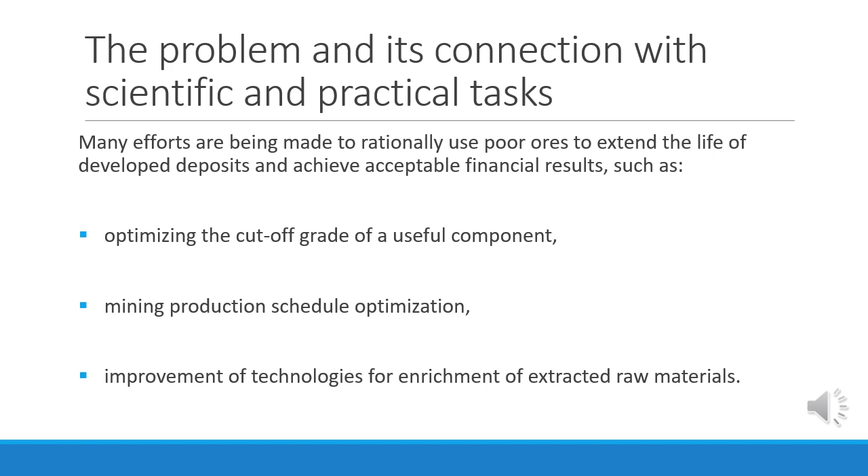The key task of information support for the effective control of ore grinding classification processes is the operational measurement of its granulometric composition and determination of the degree of grinding required depending on the physical, mechanical, and chemical mineralogical properties of the enriched raw material.

A promising direction in the development of methods to solve this problem is using non-contact and non-destructive testing tools based on ultrasonic, magnetometric, and nuclear physical measurements.

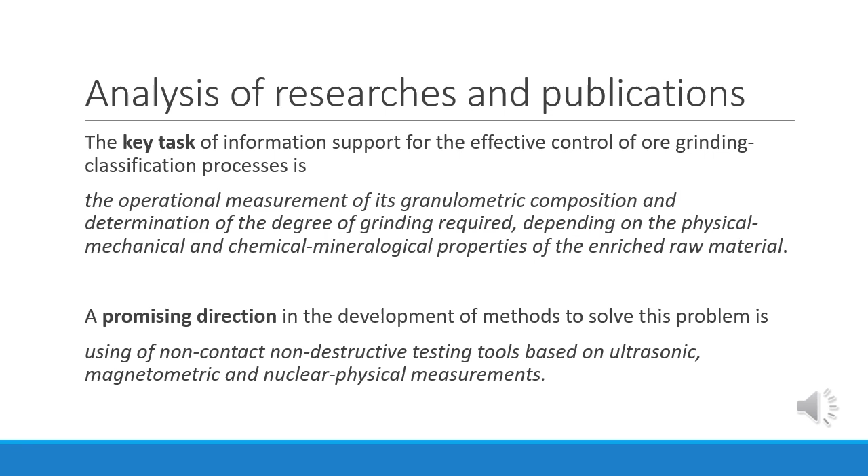There are different mineralogical varieties of ore that enter the beneficiation process. These varieties differ in several characteristics of inclusion of a useful component, fineness of inclusion, which requires various degrees of grinding for its complete disclosure.

As a marker of the changed qualitative composition of the crushed ore, it is proposed to use the density of particles of the solid phase of the pulp in the process of its deposition directly in the technological units of concentration plants. This parameter is determined based on the result of measuring the attenuation of bulk ultrasonic waves and Lamb waves propagating in the iron ore pulp and metal plate that is in contact with it, as well as the level of the pulp in the process tank in which it's located.

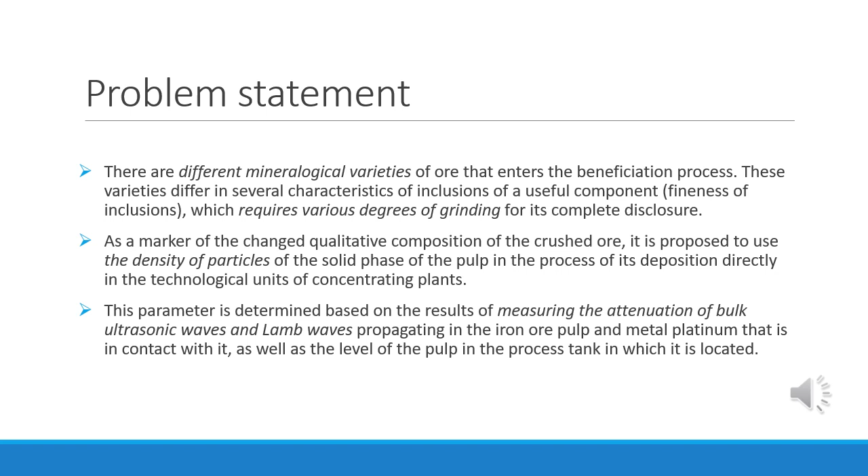On the figure, a typical technological scheme of the process of grinding ore during its enrichment is shown, which is widely used in processing plants. Initial ore and water are supplied to the mill, which operates in a closed cycle with hydrocyclones. Their flow is monitored by the sensors and controlled by a closed local automatic control system based on proportional integral derivative controllers, PID controllers.

The ore crushed in the mill is pumped through the mill discharge sump to the cyclone clusters. Hydrocyclone sands are returned to the mill and the overflow through the rougher feed tank is fed further to flotation or magnetic separation technological processes.

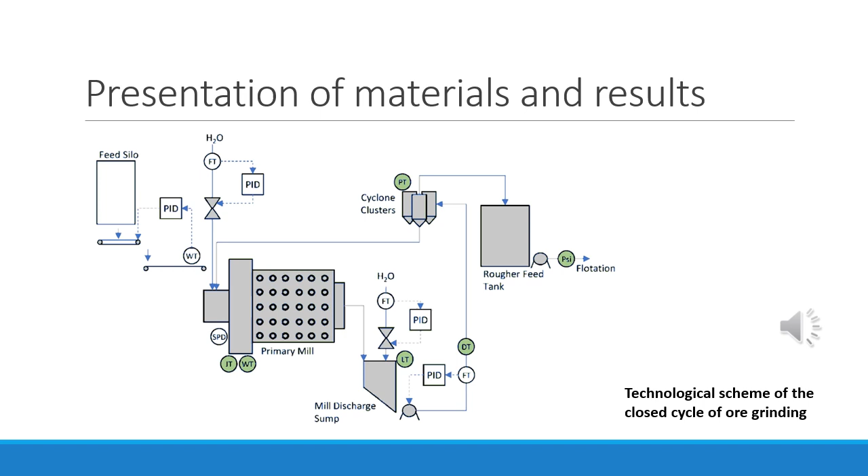Here you can see the main notation and variables used in the mathematical model of the sump in the technological chain of the closed grinding cycle. Q(t) denotes the flows at the corresponding point of the technological process. W is the content of the solid phase of the pulp. M(t) is the mass of material in the technological units at specific time t.

In addition, when modeling the grinding cycle, the following designations were adopted. P(x, t) is the cumulative yield of solid particles whose size is less than x, and delta x is the fraction of the crushed material, the particle size of which belongs to a specific interval.

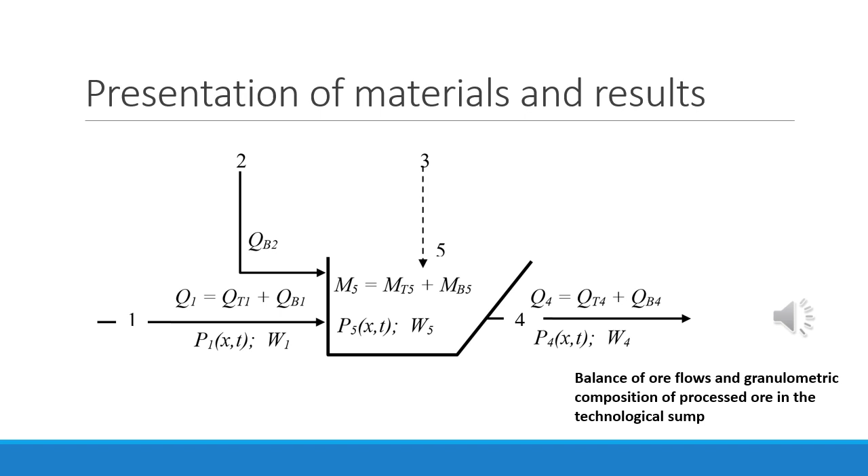In the table, the density and grindability are shown for ore types which are mined and processed from one of the deposits of the Kryvyi Rih iron ore basin. Variations of the qualitative properties of enriched raw materials lead to change in the results of grinding, opening of mineral formations.

The basic level of the automatic process control system for grinding are local automatic control systems of individual process variables. At the same time, the models of regulated objects are approximated by an aperiodic link of the first order with sufficient accuracy for practical problems. Variations of the mineralogical varieties and characteristics of the ore received for enrichment lead to ambiguous results of the operation of the mill, technological sump and hydrocyclones, as well as their models as objects of automatic control.

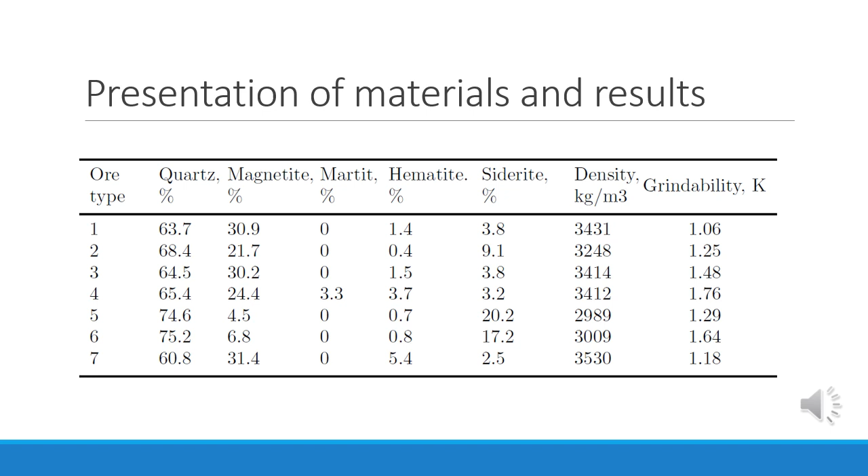To maintain the degree of grinding in the initial ore necessary for the full disclosure of the useful component, when the parameters change, the amount of additional water supplied to the technological sump is corrected. It is proposed to estimate the changes of this parameter based on the results of determining the density of particles of the solid phase of the pulp during its settling in technological sumps of the grinding cycle.

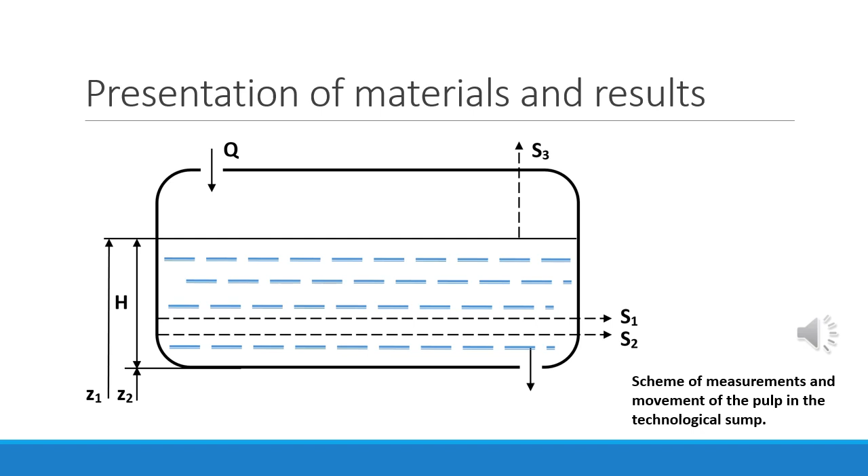As it was mentioned, S2 is based on measurements of attenuation of Lamb waves propagating in the wall of the technological sump, and S1 is based on measurement of the amplitude of high-frequency volumetric ultrasonic waves.